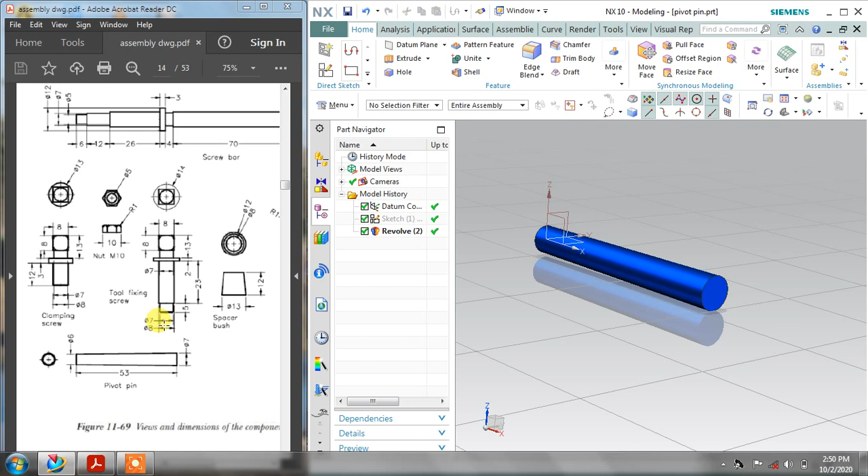What I'm going to do is make a sketch, a tapered sketch. First draw a line over here with dimension 6 diameter. The diameter is 6 - this is also a diameter but it is printed wrongly, it is a radius. Later I will show where this part gets fixed. So double click it and assign dimension 6, close, and zoom in a little so you can see the line clearly.

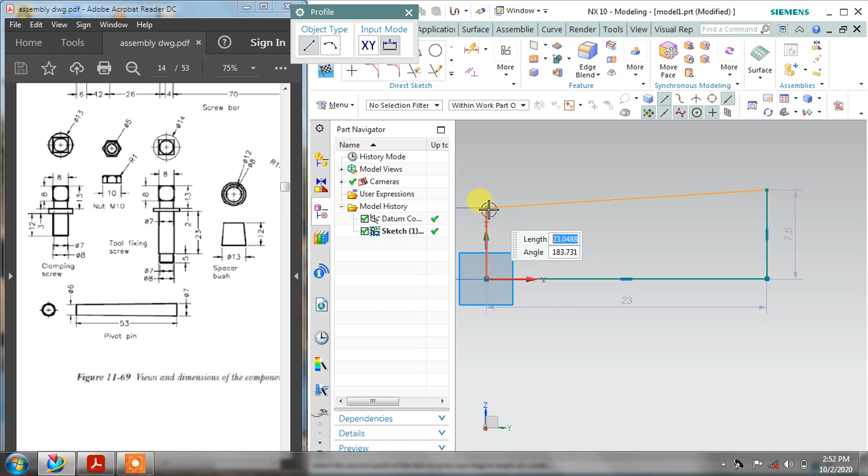Okay, this is the line. Draw another line, this is a 100 mm line. Double click over this and feed 100, close. The total length of this side is 7, so double click it and assign 7, and close.

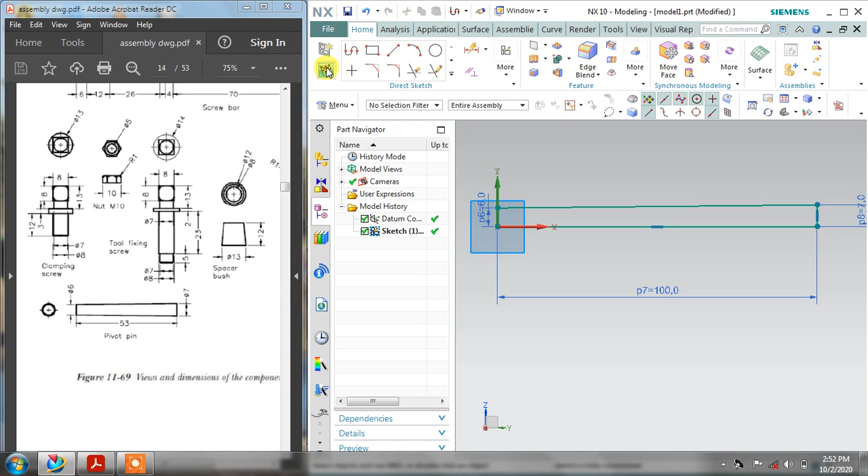My geometry, my drawing, is completely fully constrained. This is 6 and this is 7. Finish it and select the revolve command, and it is asking to use section. Select section and now axis. After selecting axis, apply. Now let me show you where this part is going to be fixed.

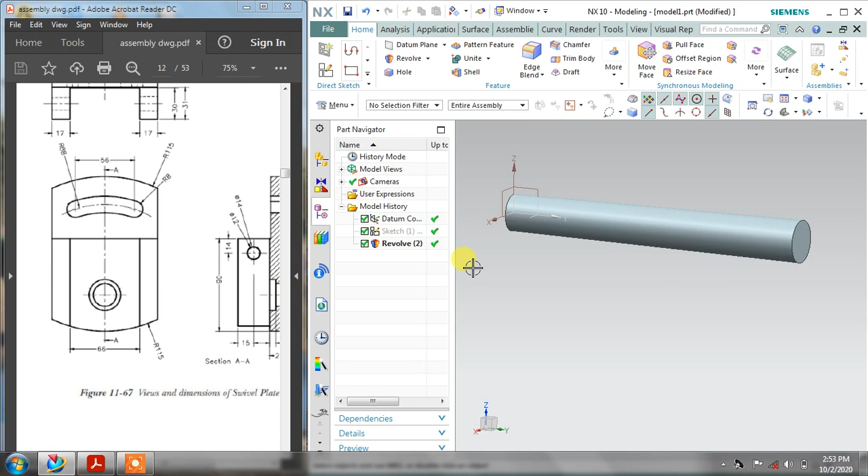This pivot pin is going to be fixed in between this part, and this part is going to be attached from this part, and that entire part will fix that place. This pivot pin is going to be fixed inside this hole, and this hole is 12 mm diameter from the left side and 14 mm diameter from the right side.

So this is the pivot pin, and the next part which I am going to make is this spacer bush. In this single tutorial I am covering these two parts, so save this pivot pin, and let's start another drawing.

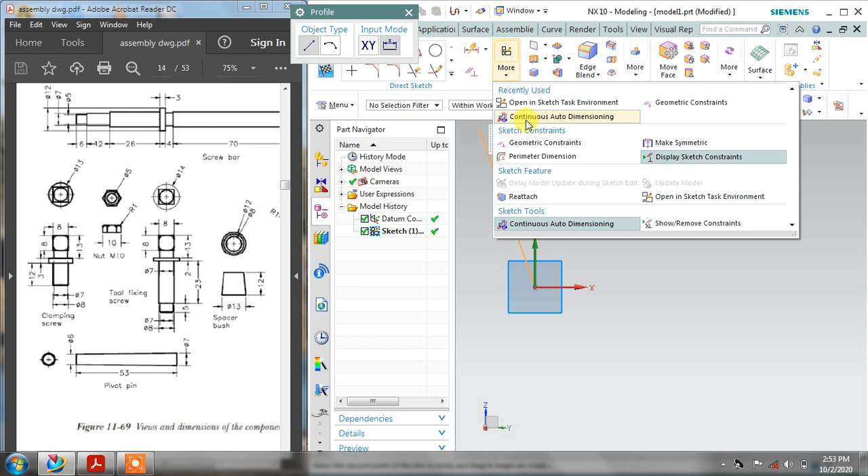Select new, and you can also assign the color as you want - it is totally up to you - and select sketch. Now this is also a tapered part, so I am going to draw a tapered part, and I am turning off this continuous auto dimensioning.

A little bit of taper. The diameter from the bottom place is 13 mm diameter. So select linear dimension, and it is 13 mm, and from the top it is 12 mm. This is the top view of this model, and there is a hole in between this spacer bush, 8 mm diameter.

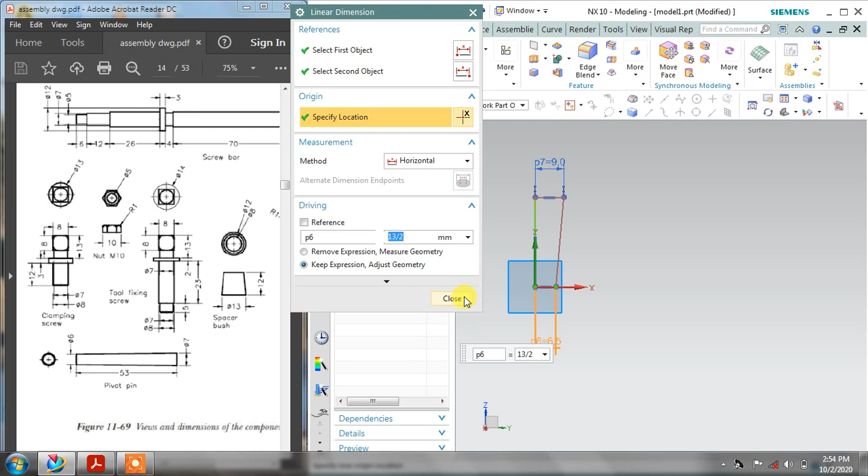One thing: this is 13 diameter and I am making a half section, so do not assign 13, assign 13 divided by 2. Close, and it is 12, so it is going to be 6, and the total length is 12. Select linear dimension, vertical dimension, select top line, bottom line, and assign 12 mm length, close it and finish.

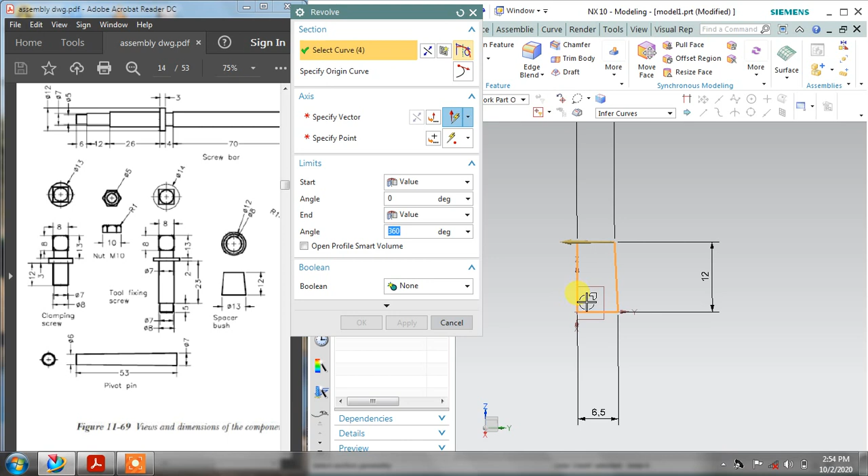After selecting finish, select the revolve command. After selecting this drawing, it is asking for a vector. Select a vector - this is my vector - and it is going to revolve 360. It should be 360, and cancel it. Now I'm hiding this sketch.

Now it's time to place an 8 mm diameter hole which goes throughout this spacer bush. For this I am selecting this hole command - or you can also make a circle over it and select extrude and boolean subtract - but I am selecting hole. It is asking for you to specify the point. The dimension of the hole is 8 diameter, so I am placing 8, and specify the point.

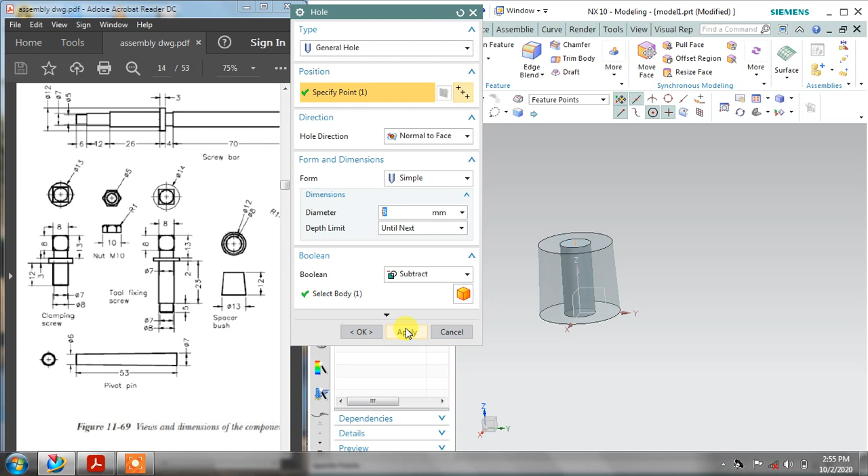As soon as you take your cursor over this edge, it will start showing you the center point. Select the center point, now the hole is placed at the proper place. Boolean should be subtract, apply and cancel. This is the spacer bush.

Also you can assign the color as you want, as I told you earlier - select the color as you want, it is totally up to you. Apply and cancel.

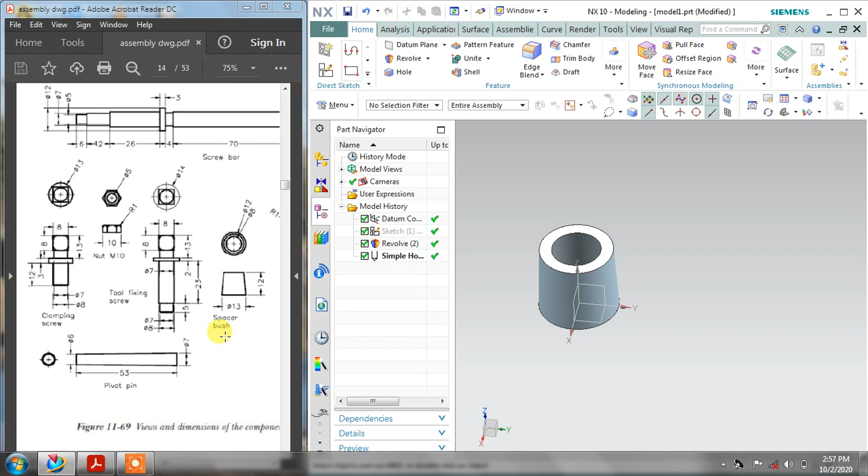So guys, this is my tutorial number 9, and in this tutorial I have covered two parts: this pivot pin and spacer bush. I hope you like this tutorial.